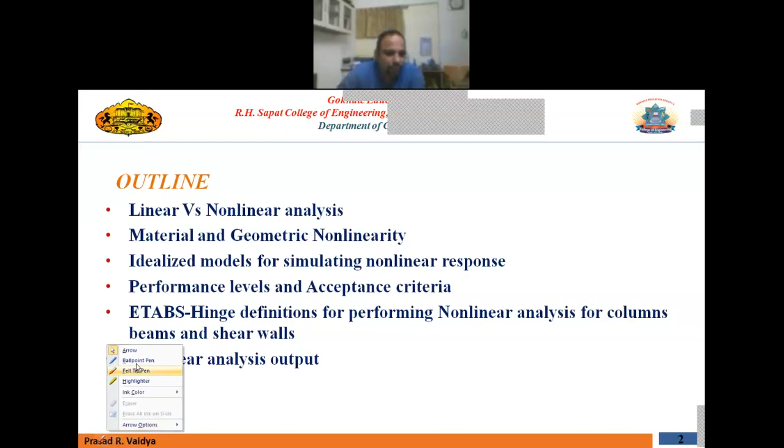Let us start our discussion with some of the major differences between linear and nonlinear analysis. We have already seen this yesterday when we did these linear things, but let us first focus on the major differences between linear and nonlinear analysis.

Linear analysis is displacement based, and the displacement relationship with load is linear. That means any force and deformation relationship is always linear, so even if you increase the force, the displacement will be proportional to the force. That means, if you apply an unrealistically high load on a particular structure, the program will return an unrealistically high displacement, which is not actually there in the structure. The structure has yielded before reaching that particular displacement. But because the relationship we assume is linear, the program will return a displacement which is also very high, and that is not realistic. That is the major difference.

Whereas in a nonlinear problem, the force-deformation relationship is always nonlinear, and the program will tell you which members have yielded and which are still in the elastic range. So that is the first difference, the load-displacement relationship.

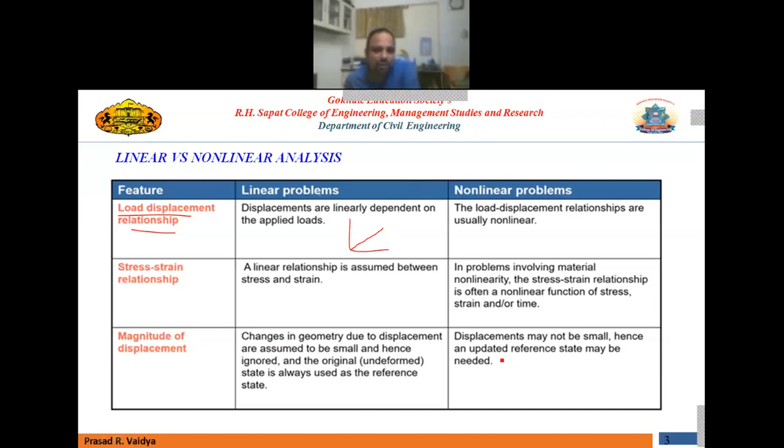There may be a small deformation P-delta or large deformation nonlinearity that we can consider. In large deformation nonlinearity, which is the most accurate one, we will consider the realistic response in a deformed shape. So that is one of the differences.

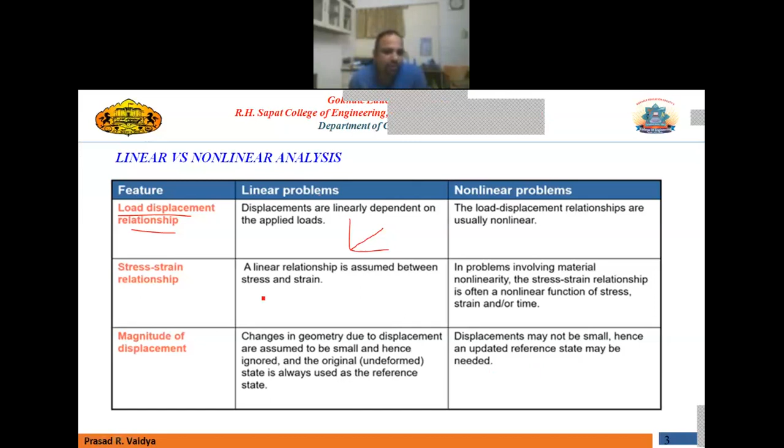Material properties, we have already discussed this. In case of linear analysis, they are linear. In nonlinear analysis, we will actually calculate the material properties based on some experimental data, and then we will use those material properties in our modeling.

Reversibility in linear analysis: we will assume that once you remove the load, the structure is completely reversible. Completely reversible means it will return to its original position after removing the load. Whereas in nonlinear analysis, the final state may be different from the initial state, meaning there may be some permanent deformation in the structure, called the final state. In linear analysis, it will always return to the initial position.

Boundary conditions remain unchanged throughout a linear analysis, but in nonlinear analysis we can change the boundary condition. For example, if you model a footing element with certain contact area with the soil, and apply a lateral load, one part will lift while another part compresses, so that portion loses contact with the soil. This behavior can be modeled as a boundary condition change in nonlinear analysis. In linear analysis, we assume the entire surface is always in contact with the soil regardless of load.

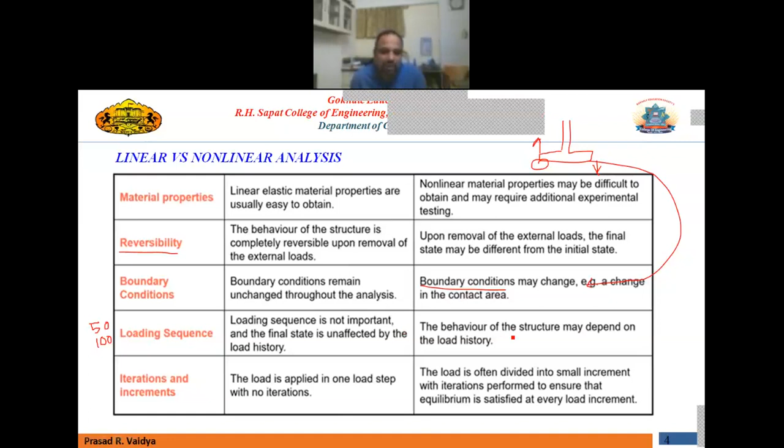This is not the case in nonlinear analysis. The behavior of the structure may depend on the load history—which load is applied first and the history of that load, meaning which magnitude is applied at which time instant. The structure reacts accordingly to the loading sequence, and the analysis extracts that effect too. So in linear analysis loading sequence is not important, but here in nonlinear analysis the loading sequence is also important.

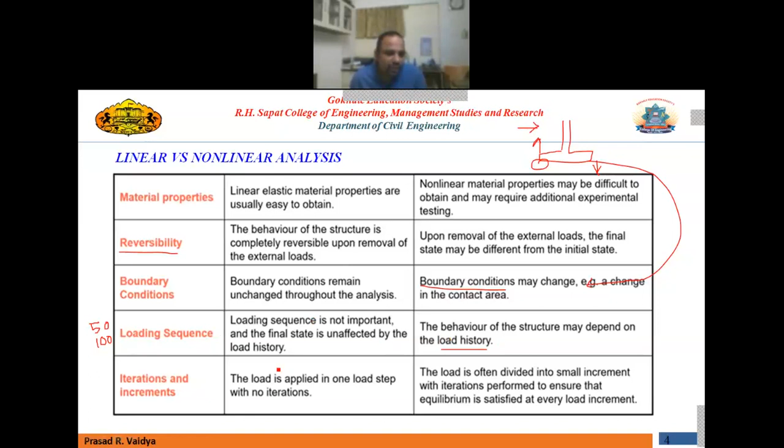Regarding iterations and increments: in linear analysis, load is applied in one single step. Here in nonlinear analysis, the incremental load can be applied with small increments along with iterations. So that is another difference.

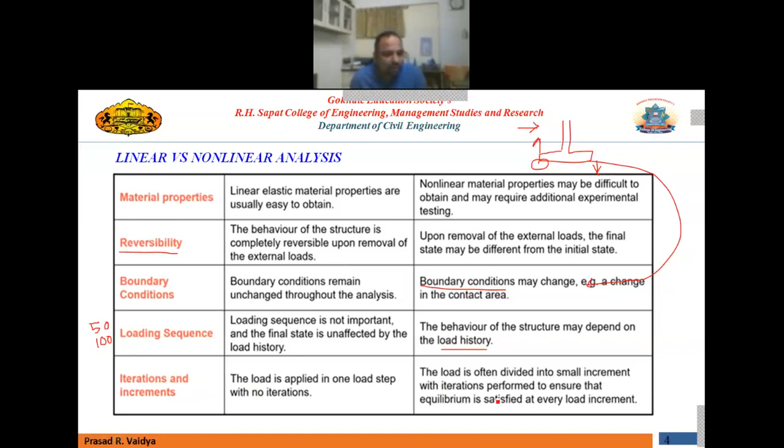Regarding computation time: since the relationship is linear, the computation time is small in linear analysis. Due to many solution steps in nonlinear analysis, the computation time is always high. There's also a possibility that many times you won't get the proper expected result, and the user will have to interact with the computer, perhaps adjusting input data, to get the final solution.

Robustness of solution can be easily obtained with no interaction needed from the user in linear analysis. Here in nonlinear analysis, you always need to interact with the computer for various adjustments, for time saving, because otherwise the program keeps running as it's an iterative process, and the solution may not converge. You need to find a solution for this, and there are many options you can implement to reduce computation time and help the solution converge.

The use of superposition and scaling of results is allowed in linear analysis. Superposition is simple: if you have a cantilever beam and apply 2 kilonewton load, find the deflection, then apply 3 kilonewton load on the same beam and find the deflection, superposition means the deflection due to 2 kilonewton plus the deflection due to 3 kilonewton equals the deflection due to 5 kilonewton load. That is superposition, applied only in linear analysis.

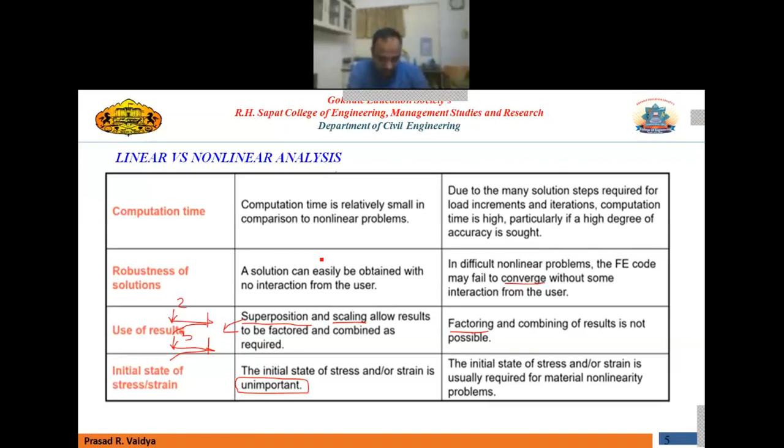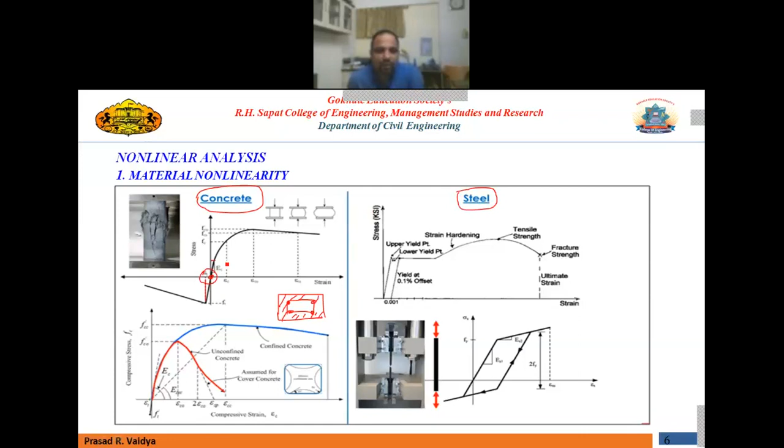Let us consider geometric nonlinearity first. What is geometric nonlinearity? This can be explained with the help of a simple example, taken from the Graham H. Powell group. Professor Powell quoted this example in his book, so I have just copied from there. I find it important to discuss so that you can understand the concept of geometrical nonlinearity.

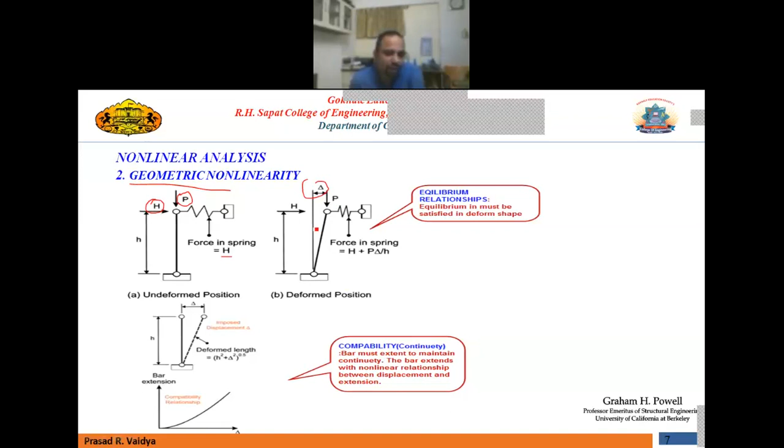Now let us say this rod deforms by a certain amount, delta. Delta is the deformation of this rod under the action of the lateral load as well as the gravity load. In that case, if you again apply the equilibrium condition, but now in the deformed shape—previously what we assumed was the undeformed shape.

Now here, if you apply equilibrium in the deformed shape, your force in the spring will be equal to H plus P delta over h. So that is the force in the spring. It is changed now, right? So this is what you call the equilibrium condition.

Now this is equilibrium in a deformed shape, and this will be the equilibrium in undeformed shape. When you apply equilibrium in a deformed shape, because this particular point will move from this position to this position, there will be certain change in the length of the bar also. It will not be the original one. That is h, whatever we have assumed, that h will change, and there will be a change in the length of the bar, because it is not possible otherwise to maintain this position of this point horizontally.

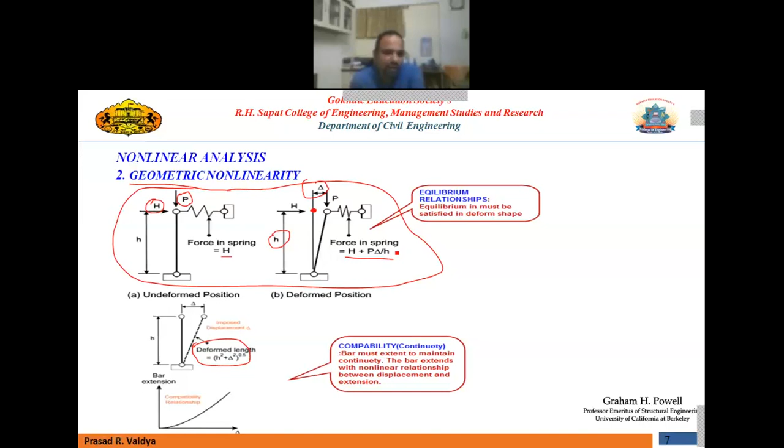So the deformed length of the bar is given by this expression. You can calculate this length. That is nothing but h square plus delta square power 0.5, or root of h square plus delta square. So that is the deformed position of the bar. First of all, this particular equation, what we are actually doing, this is called the equilibrium relationship, in undeformed or in the deformed position.

And now we are also assuming that because this position is same horizontally, this particular node will move horizontally only, there will be the change in this particular length of this particular rod, and that is called the compatibility condition or continuity condition. So both should be satisfied, equilibrium and continuity.

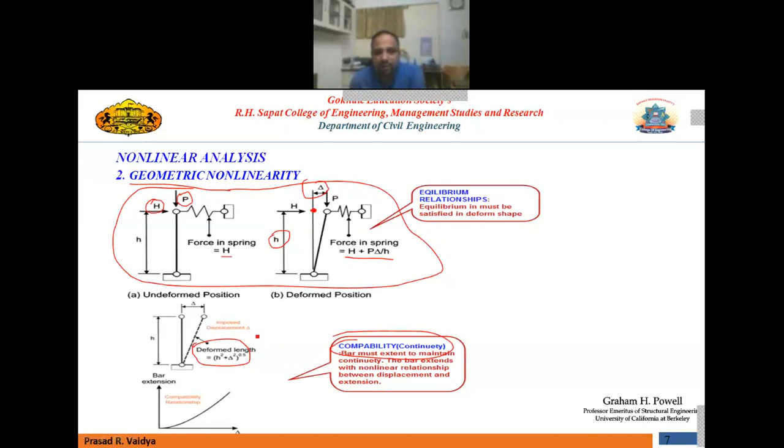Now, again, when you extend this discussion further, you will find that this particular rod or this point will not move in a perfectly horizontal position, but it moves in a circular path. So that also you can consider. That means this position and this position are not the same. It will change, so it will move in a circular path.

So in that case, the force in the spring can be worked out as H plus P delta over h cos theta. That is the force in the spring, whereas the force in the bar is P over cos theta. Okay, so there are three distinct conditions that we have considered.

The first one is where the equilibrium is considered in undeformed shape. Second one, the equilibrium is considered in the deformed shape, but we are neglecting the circular movement of this particular rod. And the third one, we are considering everything in the deformed shape as per the actual movement. So this will be the most accurate one, the most realistic behavior of this particular deformation under the forces.

So based on this, there are three types of geometric nonlinearity. One is small displacement, where the equilibrium is considered in undeformed shape. One is P delta nonlinearity, where the equilibrium is considered in the deformed shape, but we are neglecting the axial or the change in the position of this particular node. We assume that this node will move horizontally. So it is somewhat more accurate than the first one.

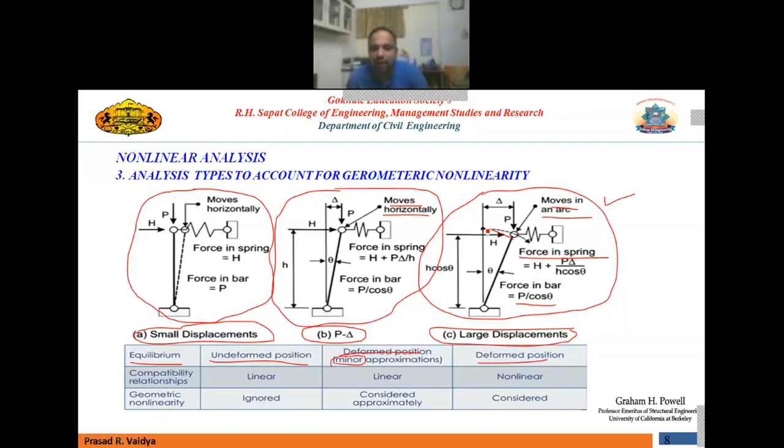Compatibility relationship, here we assume that it is linear, that is P equal to H. That means the force in the spring is equal to H. So there is a perfectly linear relationship between force and this thing. Here also it is linear. Here also it is linear.

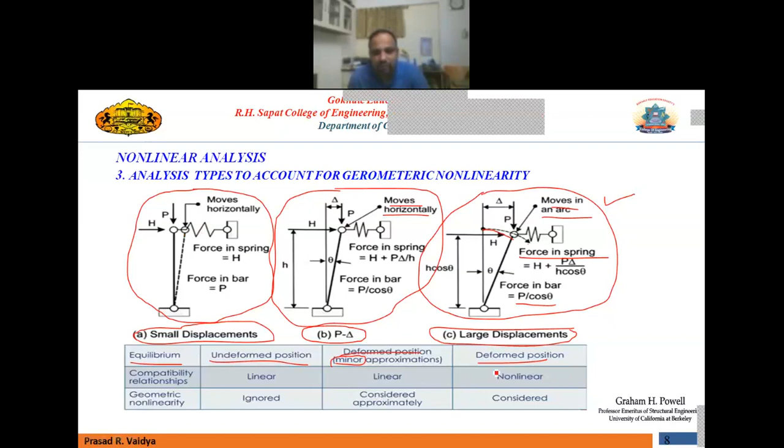But here you can see the force in the spring and the force applied, the relationship is non-linear because it moves in an arc. Geometric nonlinearity, here it is completely ignored, not considered. Here consider approximately - you can say we are considering the equilibrium in a deformed shape, but the geometric nonlinearity is approximately considered. And here it is 100% considered. So that is the difference.

So as far as the analysis is concerned, this one is the most accurate one, and this is the most complex analysis to perform, whereas these two are simple. This is actually very simple compared to this one, but here you can approximately consider the geometric nonlinearity in the form of P-delta. So most of the time we perform this type of analysis, that is P-delta analysis, where your geometric nonlinearity is approximately considered.

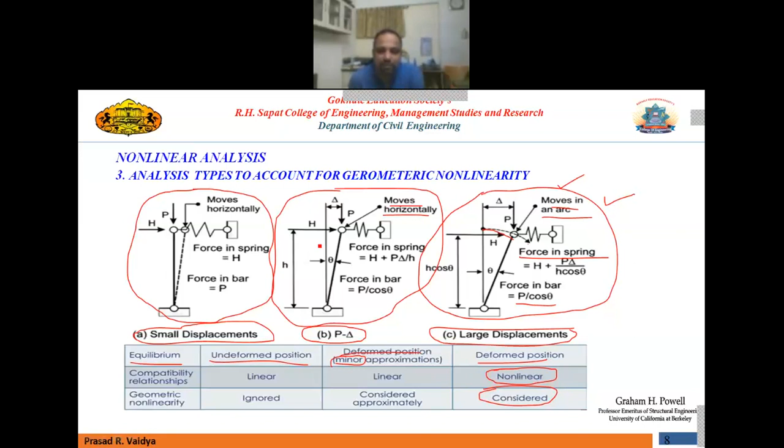So what is the difference between material nonlinearity and geometric nonlinearity? Material nonlinearity has a wide range of causes, many of which are poorly understood, and it is not governed by a single theory. That is the drawback of material nonlinearity, whereas geometric nonlinearity has clear causes governed by a well-defined mathematical theory. As you can see here, we can always calculate this, but that doesn't mean this particular procedure is simple. It is not at all simple - it is a very complex procedure.

Our knowledge of material nonlinearity depends mostly on observations and experiments. So material nonlinearity, how we can incorporate in the model, is basically dependent on our experimental data mostly. Even if there are certain codal references, some international standards, they are also based on extensive experimentation. So material nonlinearity can only be incorporated once you have the experimental data with you.

And there is a lot of data required at the material level, whereas geometric nonlinearity has clear causes, but it is difficult to implement. So geometric nonlinearity is not subject to judgment or interpretation - nothing is required. But again, because it is very difficult to consider this type of equilibrium in a deformed shape, the procedure is complex. So this is the difference between material and geometric nonlinearity in short.

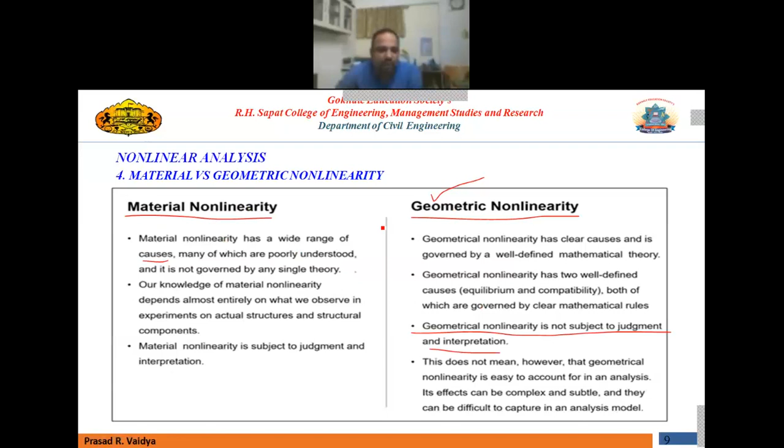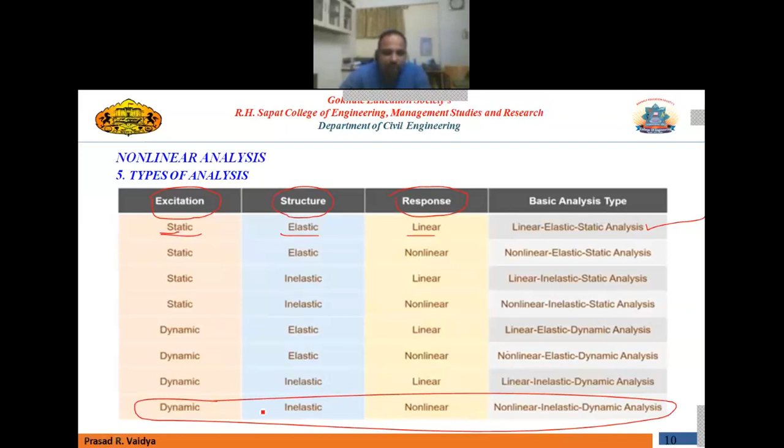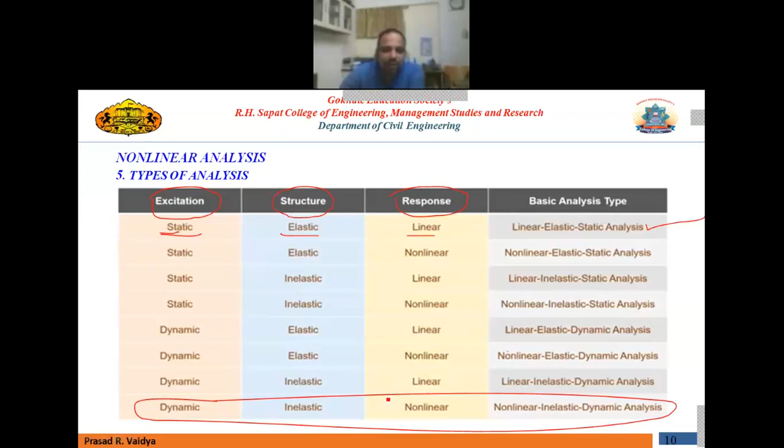It requires many efforts to do this type of analysis, where your excitation is dynamic, structure is inelastic, which is actually a realistic structure, and the response is also non-linear, that is the force-deformation relationship is non-linear. So non-linear inelastic dynamic analysis is the most complicated one, and that is what we try to do in performance based design. Not every time we need to do this type of analysis, but that is one of the steps in performance based design of the structure.

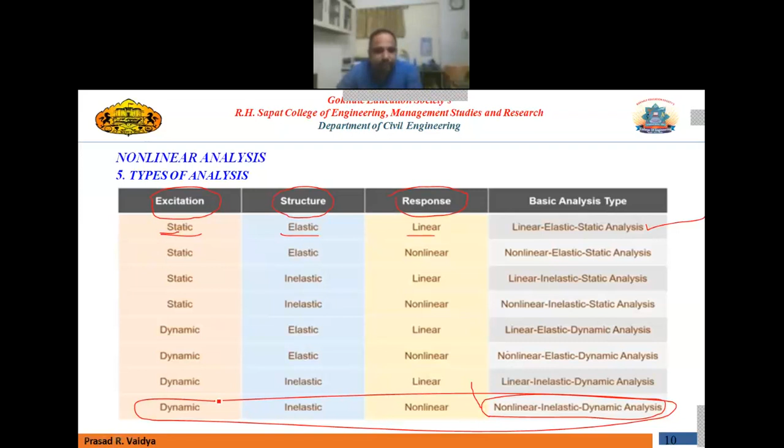Let's understand the equilibrium equations for different types of analysis. When you say linear static, it is always F equal to Ku. K represents the stiffness and U is your deformation. So force is directly proportional to stiffness times deformation. That is the simple form of equilibrium equation used for linear static analysis.

When you say linear dynamic, that means the force we get is dependent on time. So whenever you say dynamic, a t component is always introduced in the equilibrium equation - mu double dot, this is your mass matrix, then your damping matrix and stiffness matrix, all dependent on t. Because the loading is dynamic, the t factor is introduced. That is the linear dynamic governing equilibrium equation.

Non-linear static, again, the force is non-linear. So this non-linear force is introduced here, which is less than your linear assumption - you can see here, this one is your non-linear force. So Ku minus F non-linear equal to F - that will be the equilibrium equation for non-linear static.

And the last one, the most complicated, is the nonlinear dynamic equilibrium equation. The force is also nonlinear, and it is also time dependent, that is dynamic force. Your relationship for all these terms is dependent on time - that is dynamic relationship. So the nonlinear dynamic equilibrium equation is this.

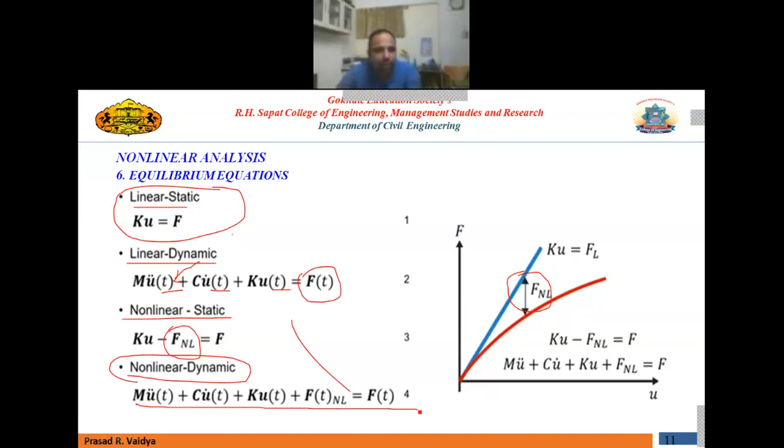Okay, now let us concentrate on how this stiffness is worked out for a particular structure. So the stiffness thing actually starts at material level.

Material level means there are two properties of the material, that is E. E is the thing which will give you the material stiffness. So once you define the relationship between stress and strain, that is nothing but E. E is non-linear. You make this E, that is Young's modulus, non-linear, and then you are capturing the material stiffness. Now this material stiffness will finally form the sectional stiffness.

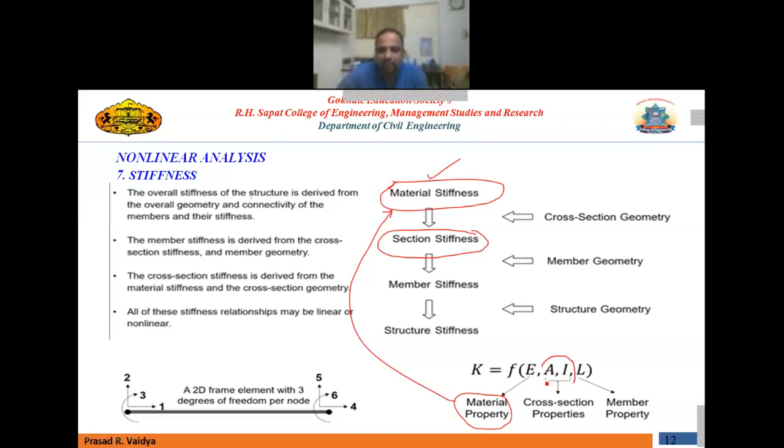Once you define your material as nonlinear, using that nonlinear property of the material, the sectional stiffness is formed, which is your A and I, that is inertia of the section and area of the section, and other properties of the section if you want.

So it starts with material stiffness, and then the sectional stiffness matrix is formed based on the material stiffness. From material level, using the sectional stiffness, the member stiffness will form. That is your L, length. So you should know this A and I to form this sectional stiffness, and you should know the E variation with stress strain variation to form the cross sectional stiffness. So all are dependent — it always starts at material level and ends at structure level.

So when these members are connected together, they will form the structure, and that will form your structure stiffness. Accordingly, level wise, once you define your stiffness at material level — the nonlinear relationship at material level — it is automatically incorporated in all other levels, for forming the sectional stiffness, the member stiffness, and ultimately to build the structural stiffness.

So this is the very primary level of stiffness, where the material property itself is nonlinear. Once you get that nonlinear relationship between force and deformation at material level, you can always build a stiffness matrix for the structure, considering all other factors at member level also. That is how the stiffness is formed for a particular structure.

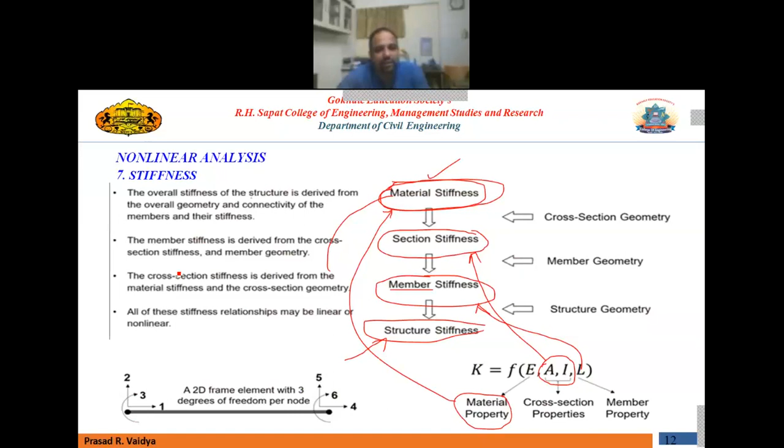Now the question is how to incorporate this nonlinearity in our model, because simulating the nonlinear response is not an easy job. So there are a number of ways to incorporate the nonlinearity.

The first method is you do the experiments. That means you should have experimental data at material level. For example, let's say you have performed an experiment for stress versus strain for a particular material — a stress strain relationship — and that will be a nonlinear relationship. This is at material level.

Then you can perform experiments at the component level itself, that is at the member level. For example, let's say you have a relationship between M and theta, that is moment rotation relationship, or maybe M and phi, which is moment curvature relationship. These are relationships at the member level, as opposed to the relationship at material level. So one way of incorporating the material nonlinearity into the model is you just find out all these relationships. Now M-theta and M-phi are again different — what this is, I will tell you.

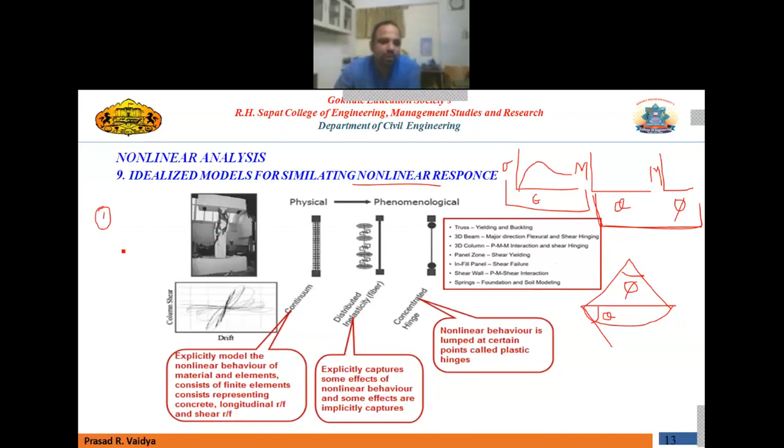The first one is experiment. You perform the experiment, applying different types of loading to get different types of relationships. This is not the only relationship, as there is a lot of change in behavior for monotonic loading versus cyclic loading, and also hysteresis loading. So hysteresis behavior is again very important data, along with the monotonic behavior.

And for concrete, the moment relationship is different for confined concrete versus unconfined concrete. So you perform all these experiments on a sample model and build this relationship curve, maybe at the material level or maybe at the member level. That is the first way of getting this data.

The second way is to use inbuilt standards, like ASCE. ASCE already has all this relationship built in. If you look at ASCE 41, you will get all the relationships for concrete as well as for steel. You can use these ready-made curves for various types of relationships, whether hysteresis behavior, cyclic behavior, or monotonic behavior. This is already inbuilt, and you can get all the data from this code.

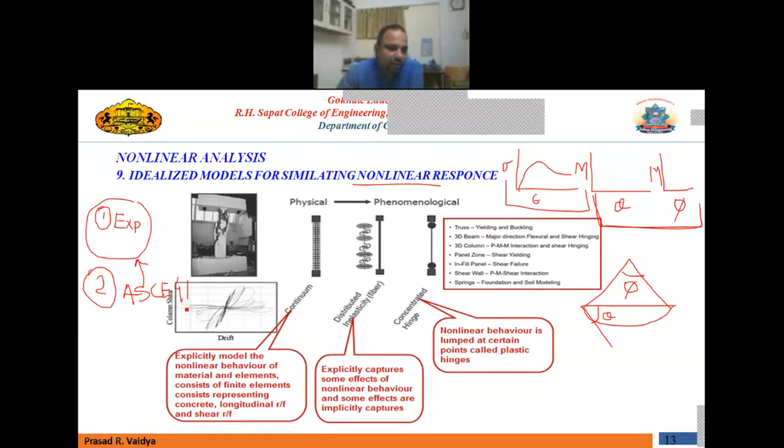But again, whatever you get from this particular standard or reference manual is based on extensive experimentation. They have already carried out extensive experiments, and based on that, there are certain recommendations you can use. There are other standards too, like FEMA, the Federal Emergency Management guideline, and ATC. You can get all these relationships there. That is the second way of obtaining this relationship.

The third way is to analyze this at the component level. That means you select a special component, maybe a beam or a column, and analyze it at the micro level in the computer model. Analyzing at the micro level means you model everything in it, maybe using solid type modeling or finite element modeling, continuum modeling for a single member, not for the entire structure, since that would be too difficult.

Using that component-level model, a single model for a single element, you find out all the relationships. That is the third way, a computer model but at the micro level. So these are the three ways of getting this nonlinear relationship between material and component level.

Now let us move ahead and see the different types of models available after getting this nonlinear relationship, the different models available in ETABS to incorporate this nonlinear behavior. The first model, which is actually a physical model, is called the continuum model.

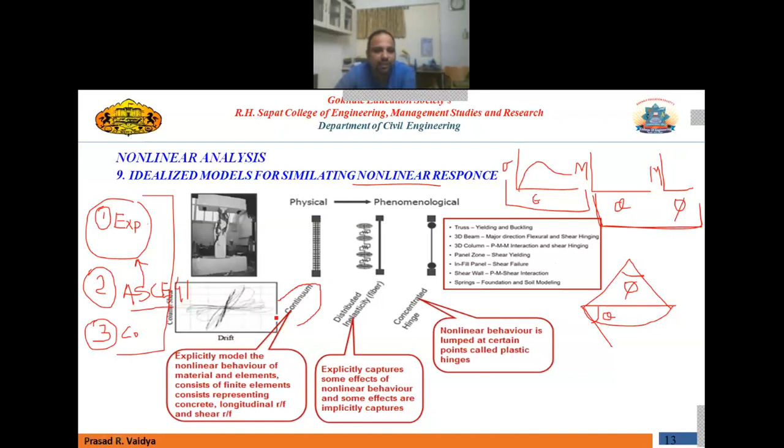Here, what we do is divide our entire element into finite elements, small elements. So we are using the finite element method, which is the most accurate one. It will explicitly incorporate all material as well as component level nonlinearity. So it's an explicit model for capturing nonlinearity, but it's very difficult to build because we are using the FE method, so it's always difficult to get the solution and it takes huge time. But the thing is, all types of nonlinearity can be captured with this continuum model. That is the first way of modeling nonlinear behavior.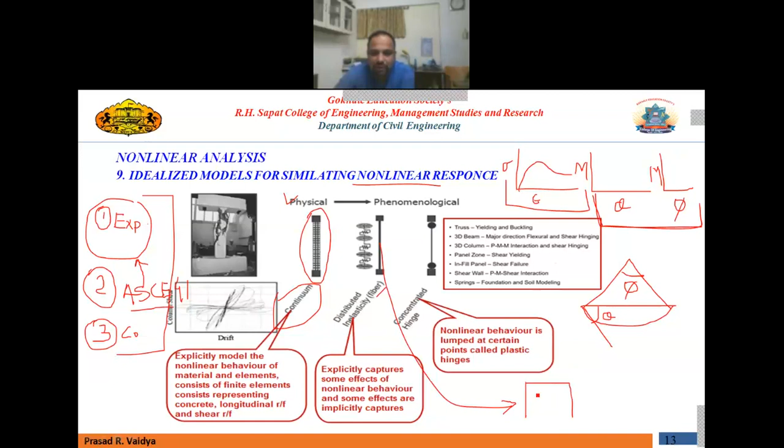The second way is called distributed inelasticity, also called fiber type modeling. Here we are not considering the entire element as nonlinear, we go at the member level. For example, let's say this is a column, and the cross section of the column is like this with certain reinforcement inside it. So what we are doing is modeling the fiber to represent it.